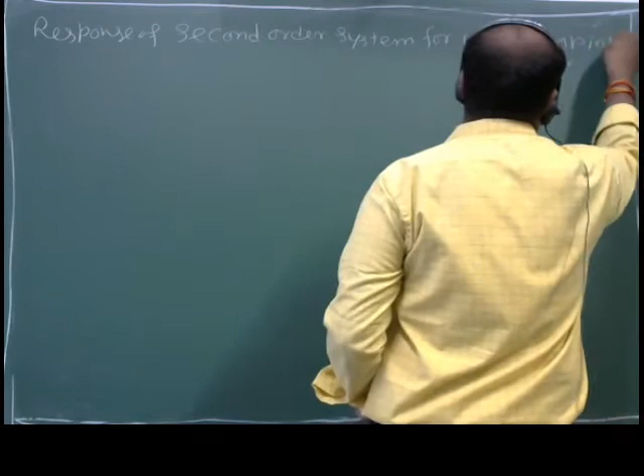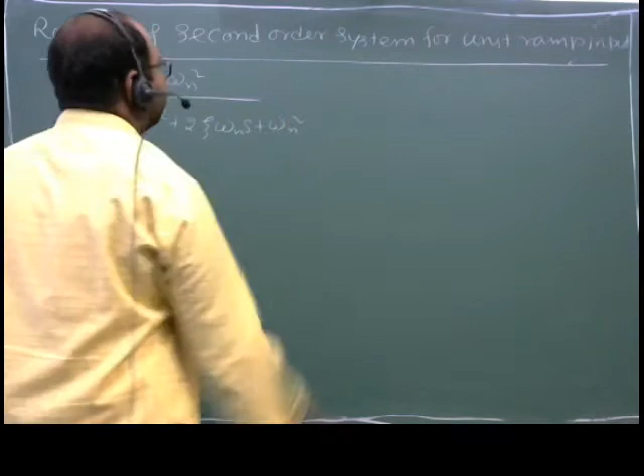So, what is the transfer function of second order system? Cs over Rs is equal to omega n square divided by s square plus 2 zeta omega n s plus omega n square. And for unit ramp input, what will be Rs? 1 over s square.

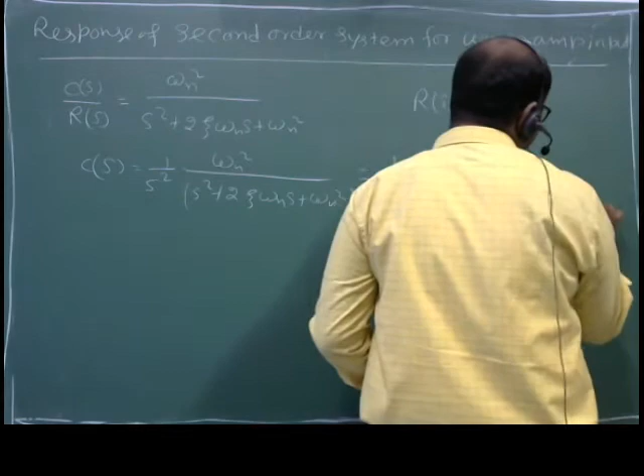So what will be the response for second order system for unit ramp input? Cs will be 1 over s square, omega n square divided by s square plus 2 zeta omega n s plus omega n square. And this can be written as 1 over s square, omega n square divided by s plus zeta omega n square plus omega n square, within bracket 1 minus zeta square.

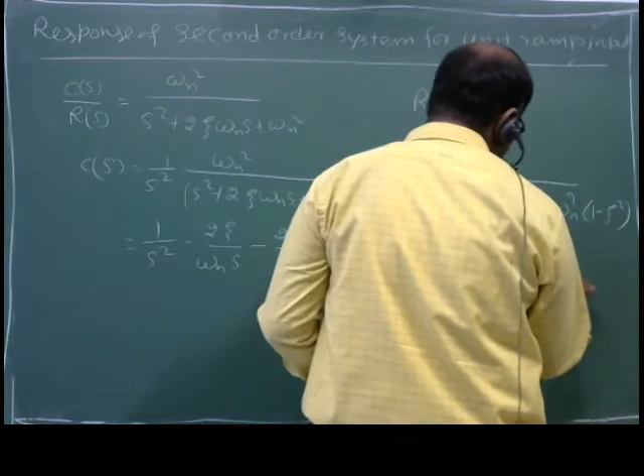And after partial fraction, 1 over s square minus 2 zeta divided by omega n s minus 2 zeta divided by omega n s plus zeta omega n divided by s plus zeta omega n square plus omega d square plus 2 zeta square minus 1 divided by s plus zeta omega n square plus omega d square, right?

And after taking inverse Laplace, our Ct becomes T minus 2 zeta by omega n plus 2 zeta by omega n e raised to minus zeta omega n t cos omega d t plus 2 zeta square minus 1 divided by omega d e raised to minus zeta omega n t sin omega d t, or

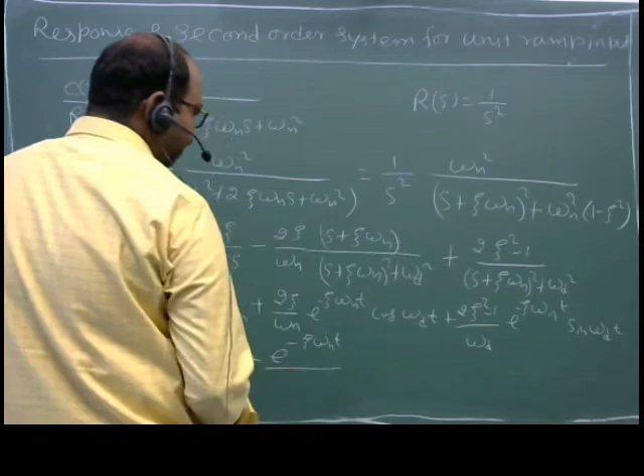t minus 2 zeta by omega n plus e raised to minus zeta omega n t divided by omega n under root 1 minus zeta square, within bracket 2 zeta under root 1 minus zeta square cos omega d t plus 2 zeta square minus 1 sin omega d t.

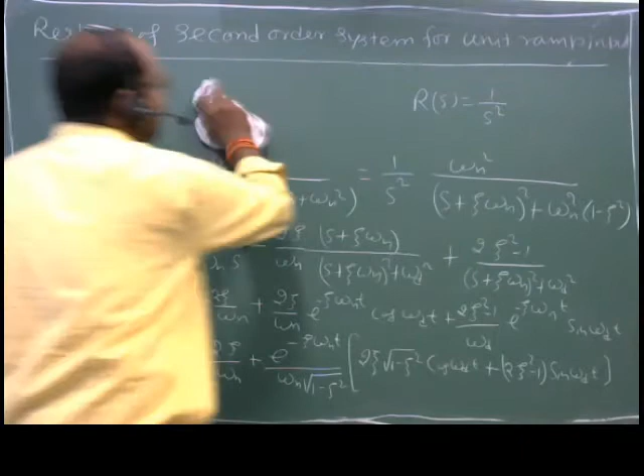And if I consider 2 zeta under root 1 minus zeta square as sin phi, then 2 zeta square minus 1 will be cos phi,

and then our Ct will become t minus 2 zeta by omega n plus e raised to minus zeta omega n t divided by under root omega n, or simply omega d, and here sin phi cos omega d t plus cos phi sin omega d t, and this becomes sin omega d t plus phi, omega d t plus phi.

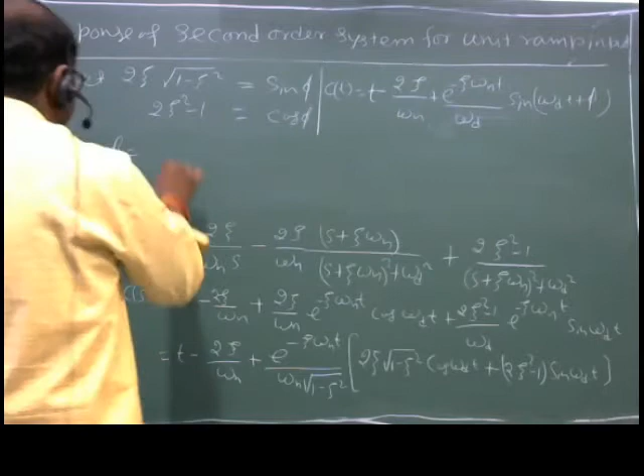Where phi can be written as tan inverse 2 zeta under root 1 minus zeta square divided by 2 zeta square minus 1. This is our phi, and from here if I calculate error,

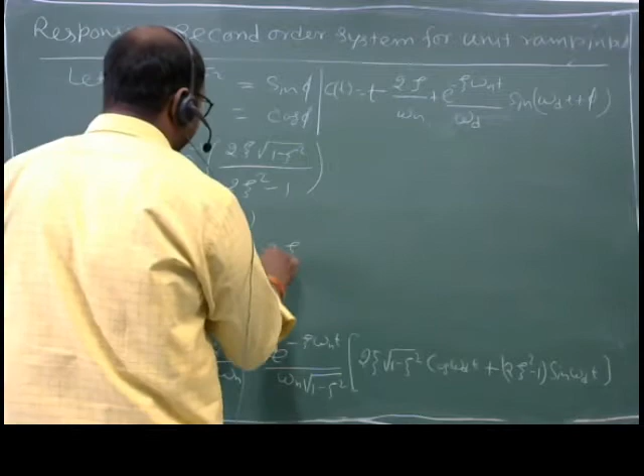then Et is equal to RT minus Ct. So RT minus Ct is error, where RT is T and Ct is T minus 2 zeta by omega n plus e raised to minus zeta omega n t divided by omega d sin omega d t plus phi.

Therefore, the error is 2 zeta by omega n minus e raised to minus zeta omega n t over omega d sin omega d t plus phi. This is our error for second order system for unit ramp response, right?

And the steady state error is nothing but limit t tends to infinity of et. This is our steady state error, and as t tends to infinity, this term goes to 0.

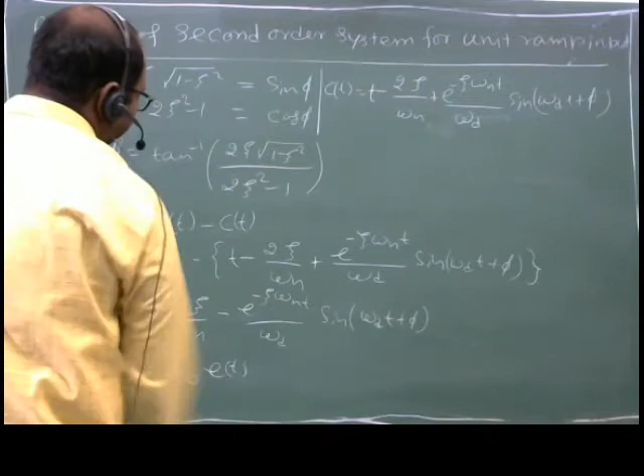Therefore, we have the value 2 zeta by omega n, and this shows that there will be a lagging of 2 zeta by omega n in output from the input, right?

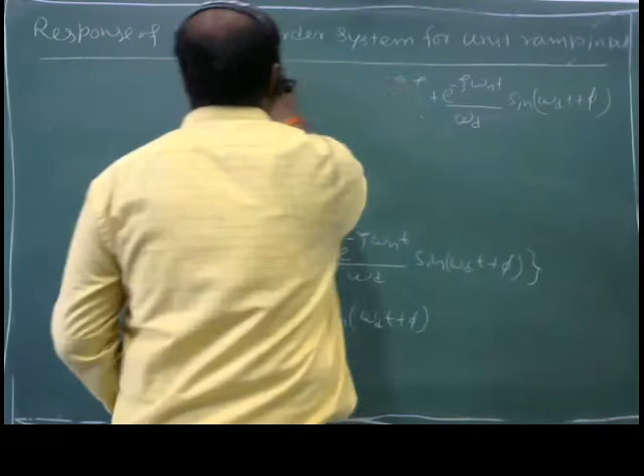Next is response of second order system for unit impulse input. For unit impulse input.

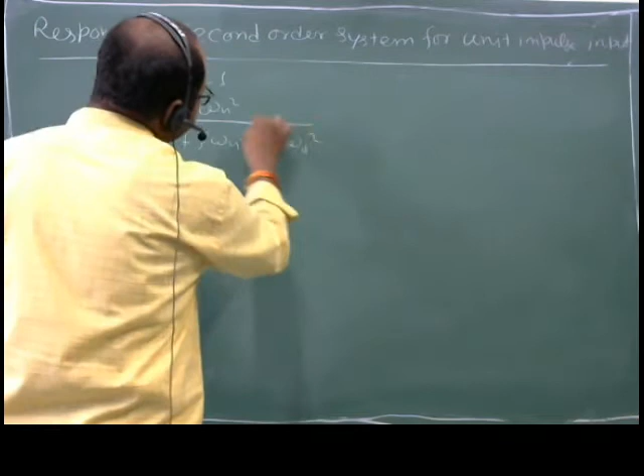Same as for the case of unit ramp and unit step input. For unit impulse input, our RS will be 1. So CS becomes omega n square divided by s plus zeta omega n square plus omega d square, s plus zeta omega n square plus omega d square.

And clearly our CT is omega n divided by under root 1 minus zeta square, e raised to minus zeta omega n t sin omega d t. This will be our response of second order system for unit impulse input.

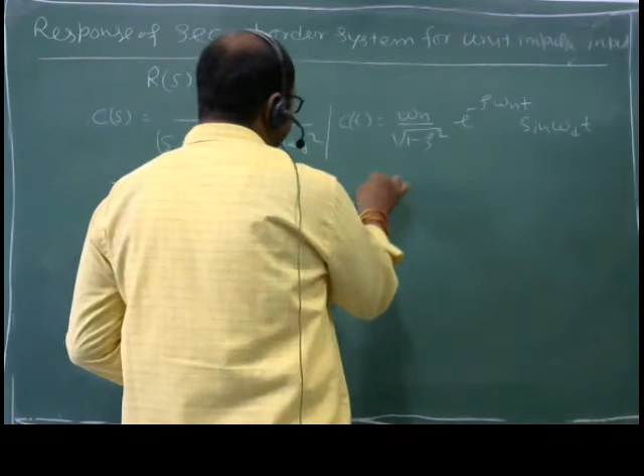Now, as zeta is less than 1, the response will be CT is equal to omega n divided by under root 1 minus zeta square, e raised to minus zeta omega n t, sin omega n under root 1 minus zeta square t. And there will be no change in the response when zeta is less than 1, and clearly it is underdamped response.

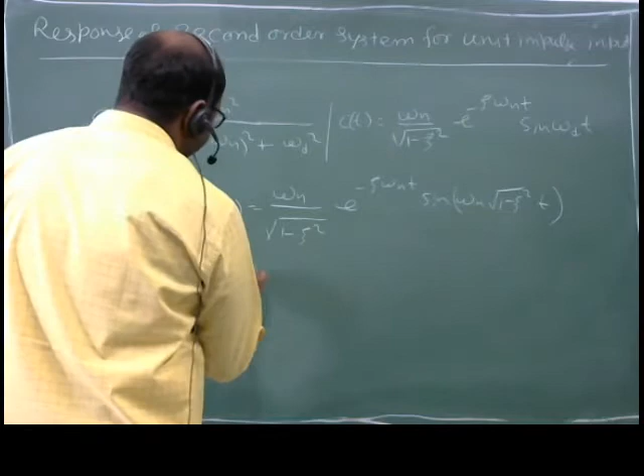Critically damped response for zeta equal to 1. As zeta is equal to 1, this term CT will be omega n e raised to minus omega n t, and in the limit as zeta tends to 1, we get sin omega n under root 1 minus zeta square t, divided by under root 1 minus zeta square. Clearly this is a 0 by 0 term, not defined. So I will have to multiply omega n t in the denominator, giving omega n square t e raised to minus omega n t as zeta tends to 1.

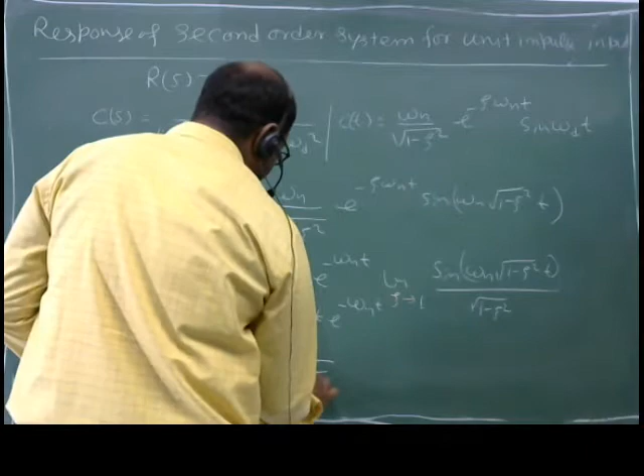Third case, when zeta is greater than 1, our CT will be omega n divided by j under root zeta square minus 1, e raised to minus zeta omega n t, sin j omega d t.

So this is the response of a second order system for unit impulse input.

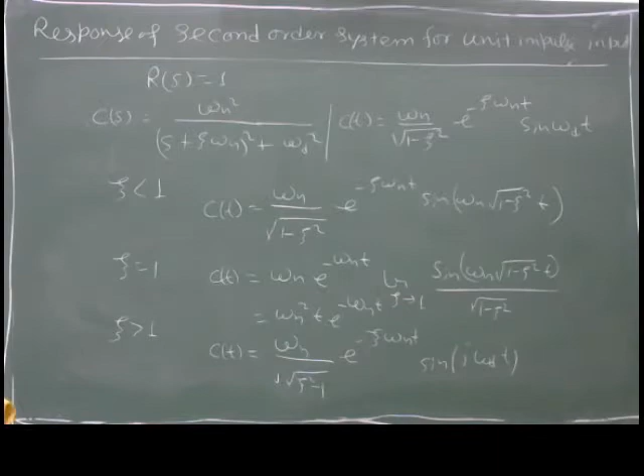Next is error analysis, steady state error. So steady state error is error as t tends to infinity. Error in the system as t tends to infinity is known as steady state error.

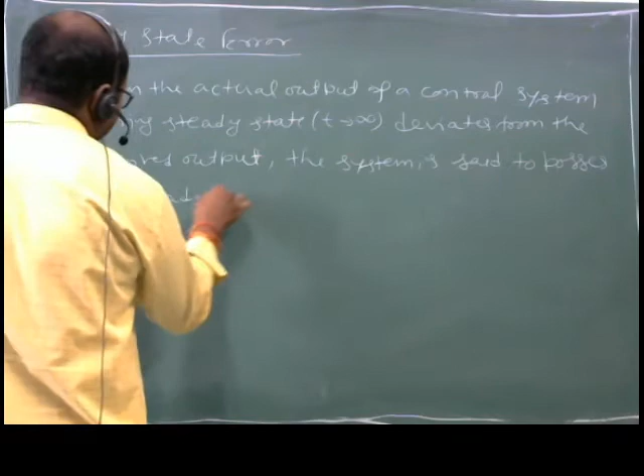When the actual output of a control system during steady state, meaning as t tends to infinity, deviates from the desired output, the system is said to possess a steady state error. So when actual output deviates from the desired output as t tends to infinity, the system has steady state error.

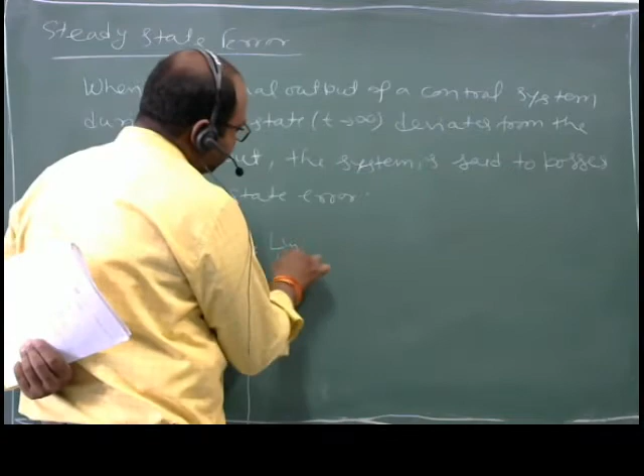For calculation of steady state error, ESS, I can calculate limit t tends to infinity of ET. But limit t tends to infinity ET is a very complex calculation. So another formula for ESS is limit s tends to 0 of S into ES.

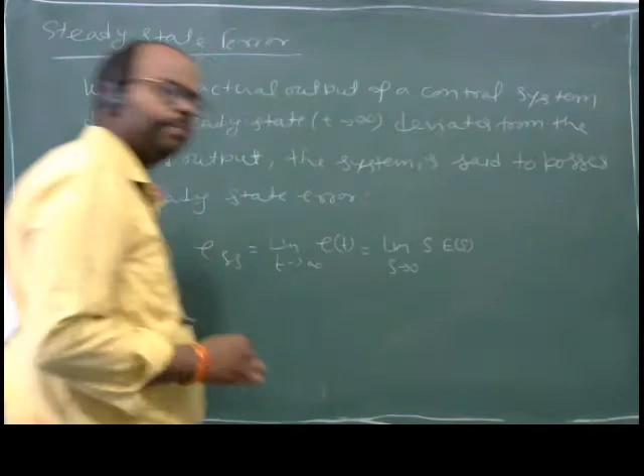And what is ES for this type of system? ES is RS divided by 1 plus GS HS.

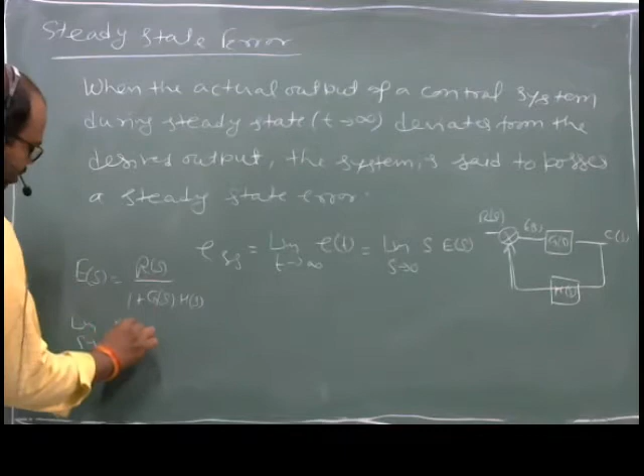And as S tends to 0, ES is limit S tends to 0 of RS divided by 1 plus limit S tends to 0 of GS HS. From this formula, if I calculate limit S tends to 0 of S ES, this will be limit S tends to 0 of S RS.

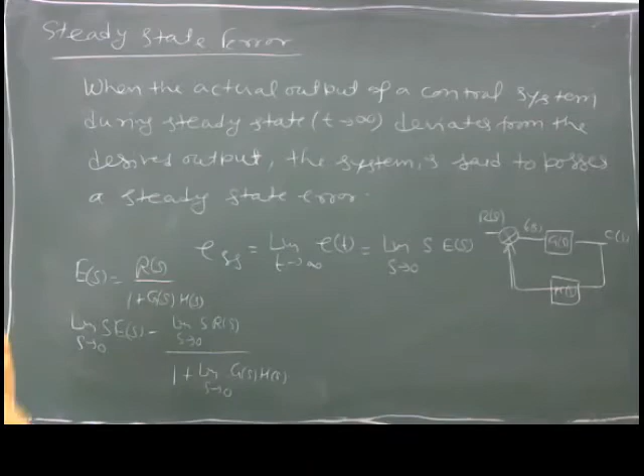For unit step input, RS is 1 by S. For unit ramp input, it is 1 by S square. For unit parabola input, it is 1 over S cube, like 2 over S cube, but keeping the 2 aside, I am taking it as 1 over S cube.

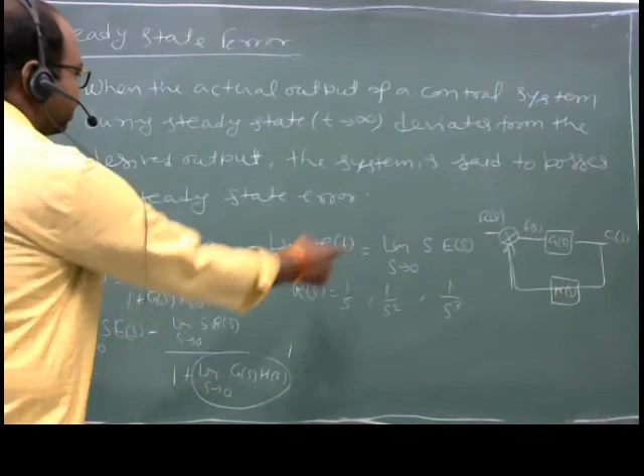This can be calculated as, if I put RS is equal to 1 over S, then S and S cancel out, and the main feature is this part. For 1 over S square, one S cancels out, and this can be written as 1 over S plus S GS HS. As S tends to 0, this term goes to 0, so now limit S tends to 0 of S GS HS is the main part of steady state error.

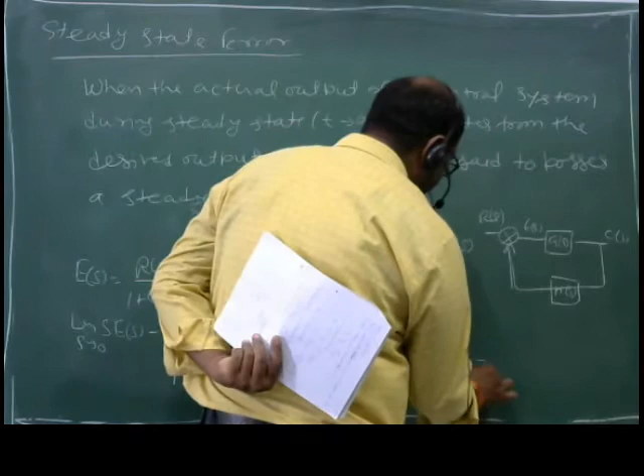And third one, if the input is 1 over S cube, then this becomes 1 over limit S tends to 0 of S square GS HS. So finally, for calculation of ESS, the main role is this term GS HS, which is present everywhere.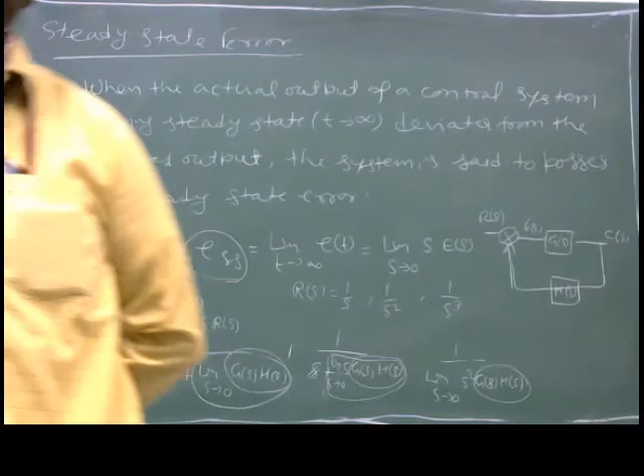GS HS is present everywhere, so we should know about this GS HS. What is this GS HS? For any system, what is the closed loop transfer function? CLTF is GS over 1 plus GS HS.

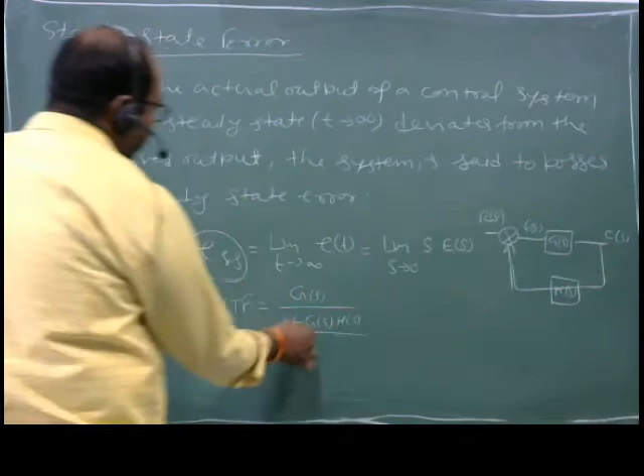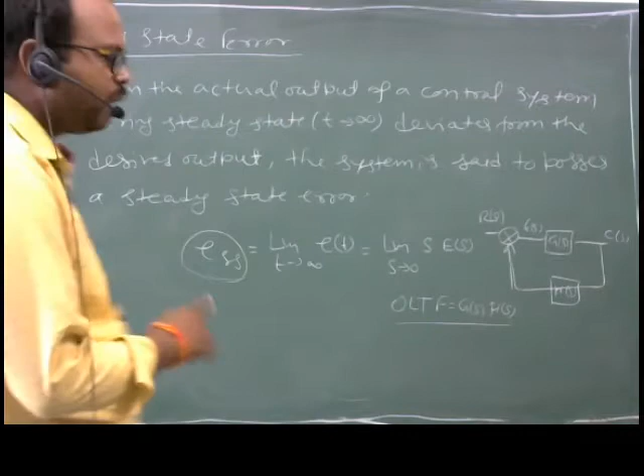Here this GS HS is termed as the open loop transfer function, meaning the product of forward path gain and feedback path gain is called the open loop transfer function.

And the type of GS HS we can calculate from the number of poles of GS HS at the origin, and this shows the type of the system.

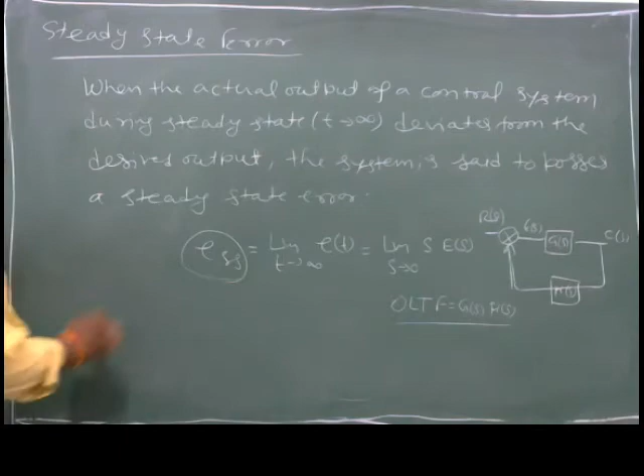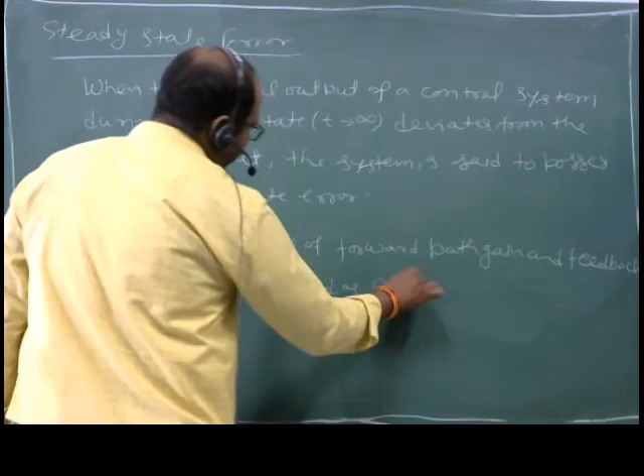So the definition of open loop transfer function: the product of forward path gain and feedback path gain is termed as open loop transfer function.

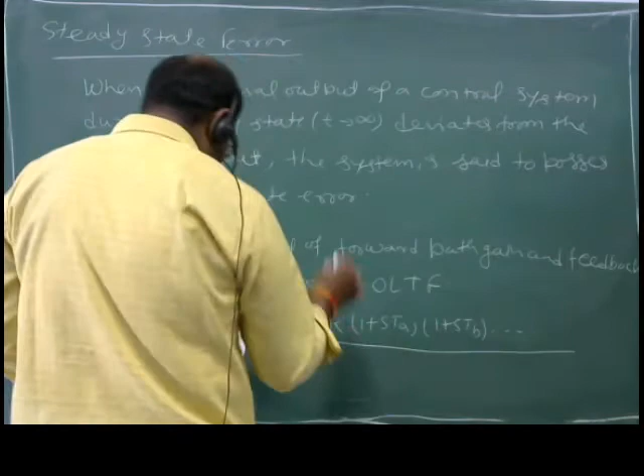This open loop transfer function in general terms can be given as K, a constant or DC gain, times 1 plus STA, 1 plus STB, and so on, divided by S power n, 1 plus ST1, 1 plus ST2, and so on. This is the general form of open loop transfer function, GS HS.

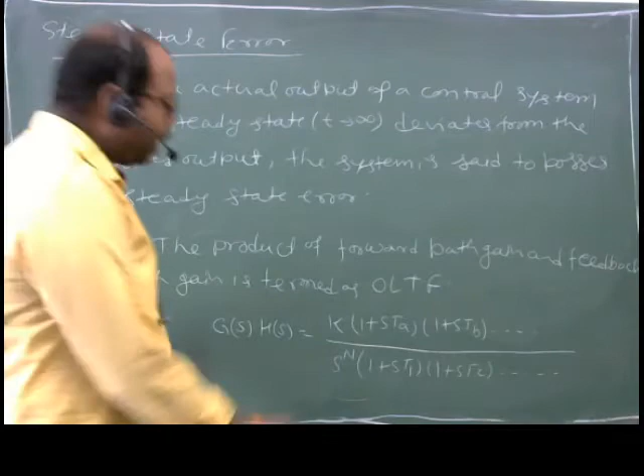In this GS HS, K is the DC gain of the system. How can I calculate this DC gain? If all the S's are set to 0, then GS HS will be equal to K.

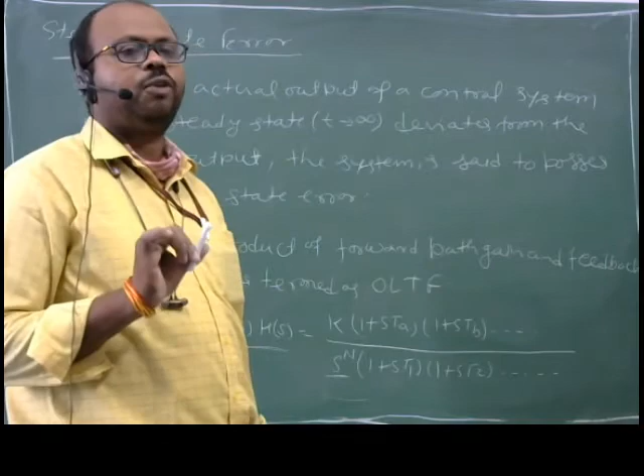So this definition that as S tends to 0, GS HS will have the value of DC gain, is wrong, as far as this S power n is present. So first of all, define the type of the system.

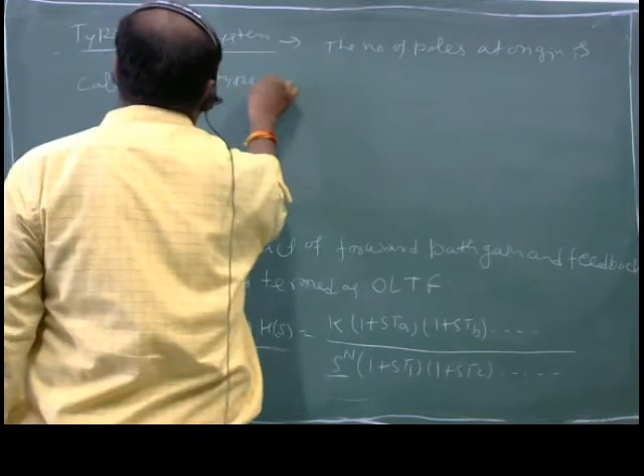What is the type of the system? The type of the system is the number of poles at origin. That is called the type of the system. So number of poles at origin, let's call this n.

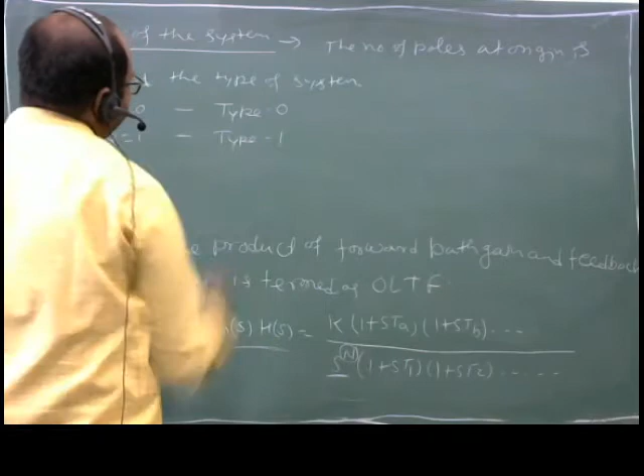If n is equal to 0, then there is no pole at origin, so the type is 0. If n is equal to 1, there is one pole at origin, so it is a type 1 system. If n is equal to 2, it is a type 2 system, and so on. For n is equal to n, it is a type n system.

So for type 0 system, is this definition correct, that as s is equal to 0, this GSHS has only the DC gain, right?

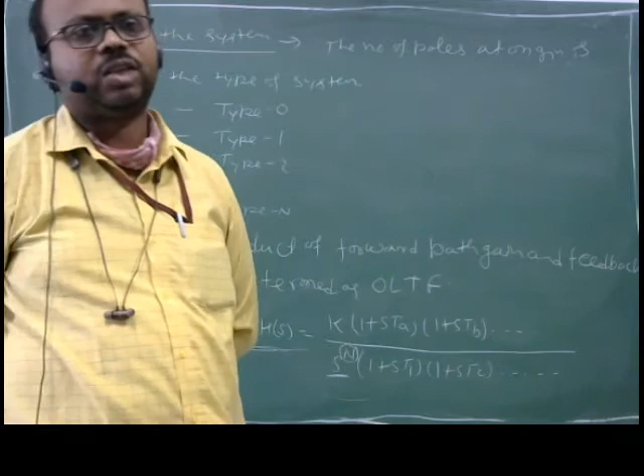GSHS by s when s is equal to 0. Is that clear? Now, not division, I have to multiply s, so s times GSHS here, and then I will find the value of k when s is equal to 0, right?

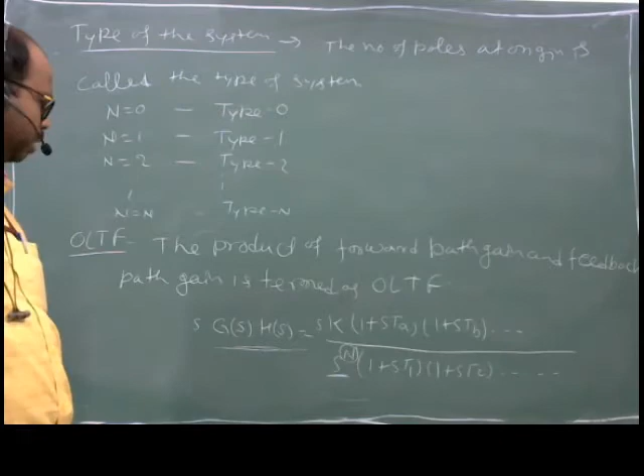So this is the type of the system.

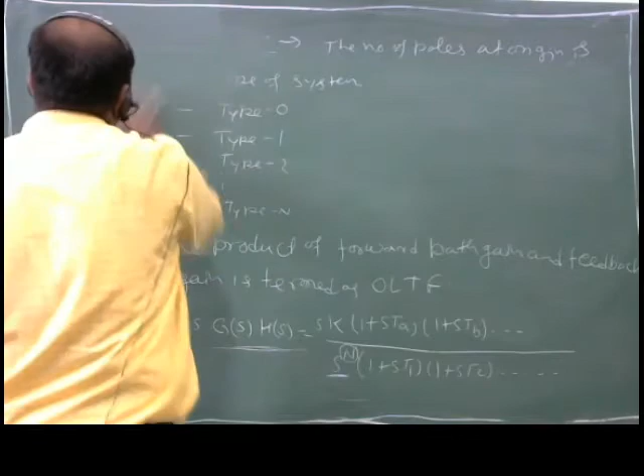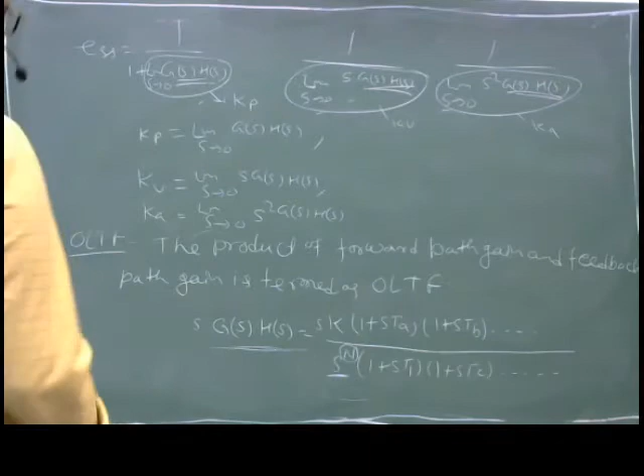अगर F S, FT का लाप्लास है, तो S F S क्या होगा? किसका लाप्लास होगा? दिस विल बी द लाप्लास ऑफ F डैश T, मीन्स फर्स्ट डेरिवेटिव ऑफ F T विद रेस्पेक्ट टू T, d/dt F T। और S स्क्वायर F S क्या होगा? ये किसका लाप्लास होगा? F डबल डैश T, और d2 ओवर dt2 F T।

तो अगर हम इसको डिस्प्लेसमेंट माने, तो डिस्प्लेसमेंट और पोजीशन, तो अगर ये पोजीशन है और डिस्प्लेसमेंट है, तो फर्स्ट डेरिवेटिव विद रिस्पेक्ट टू टाइम, ये क्या बनेगा? वेलोसिटी। एंड सेकेंड डेरिवेटिव ऑफ डिस्प्लेसमेंट और फर्स्ट डेरिवेटिव ऑफ वेलोसिटी, ये क्या बनेगा? एक्सेलरेशन।

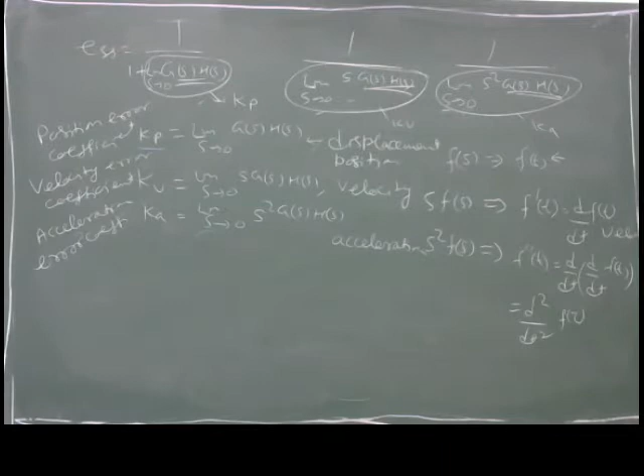So next is static error coefficients.

Static error कोइफिशिएंट्स। तो यही जो Kp, Kv और Ka हैं, इनको क्या नाम दिया गया? स्टैटिक एरर कोइफिशिएंट्स। So during steady state period, the error is also called static error, and therefore first is position error coefficient, which is Kp.

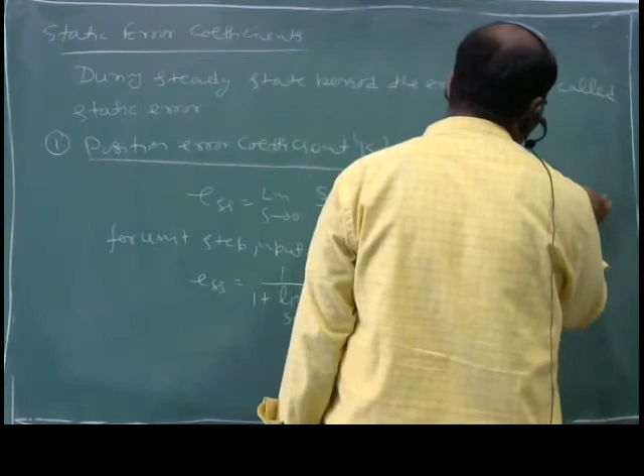So ESS is limit s tends to 0, s Rs divided by 1 plus Gs Hs, for unit step input. Rs is equal to 1 by s. So ESS is equal to 1 over 1 plus limit s tends to 0 Gs Hs, and Kp is limit s tends to 0 Gs Hs, and therefore ESS is equal to 1 over 1 plus Kp.

तो Kp कब कैलकुलेट होगा? When step input is there. Kp कब कैलकुलेट होगा? When step input is there, right? Next is, this one is static position error coefficient. Next is static velocity error coefficient.

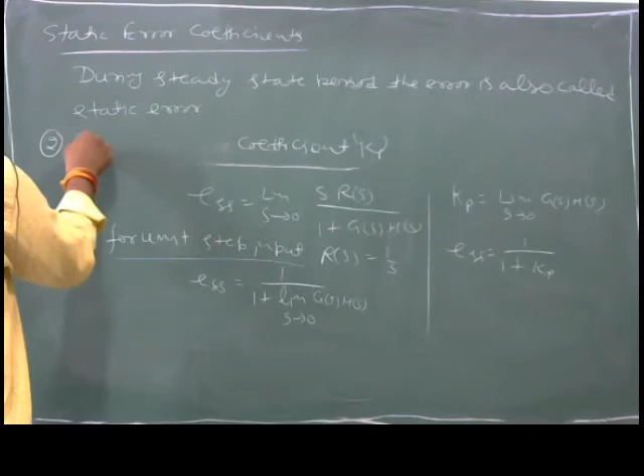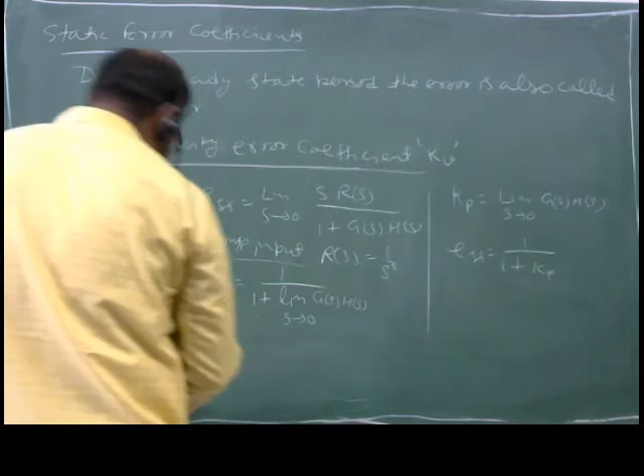Static velocity error coefficient, and it is notified as Kv. Again, ESS is equal to limit s tends to 0, s Rs over 1 plus Gs Hs, and for unit ramp input, Rs is equal to 1 over s square, and in that case this becomes limit s tends to 0 of s plus s Gs Hs, and as s tends to 0, this value goes to 0, and ESS becomes 1 over limit s tends to 0 s Gs Hs, and Kv is limit s tends to 0 s Gs Hs, and steady state error is nothing but 1 over Kv.

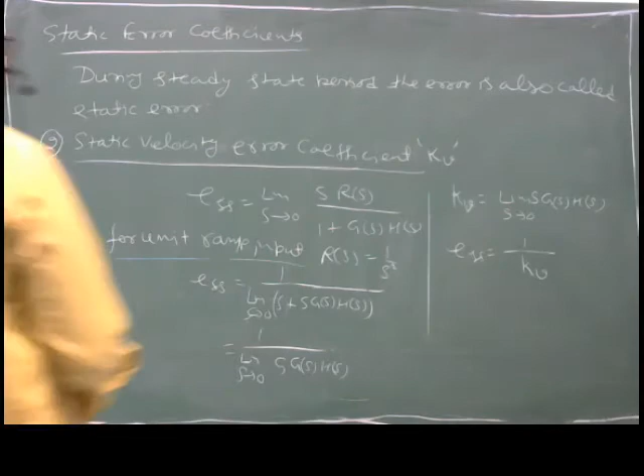Steady state error is nothing but 1 over Kv. Third one is static acceleration error coefficient. Acceleration error coefficient.

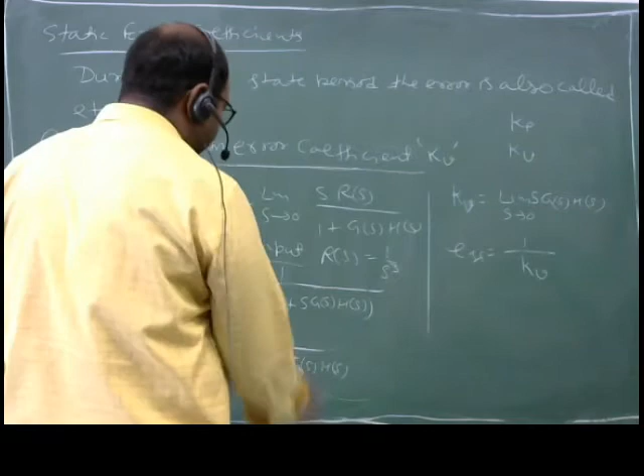So first, for unit step input, I will calculate only Kp. For unit ramp input, I will calculate only Kv, and for unit parabola input, Rs becomes 1 over s cube, and then this value becomes like this, 1 over limit s tends to 0, s square Gs Hs, and here Ka is equal to limit s tends to 0, s square Gs Hs, and ESS is equal to 1 over Ka.

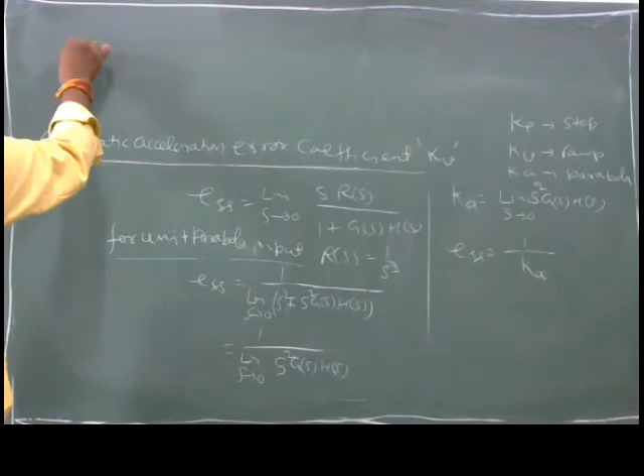ठीक है, तो अगर हम एक छोटा सा टेबल बनाना चाहें static error coefficients को लेकर, तो क्या बनाएंगे? For step input, ESS, this will be 1 over 1 plus Kp, and Kp, Kv, Ka। Kp will be limit s tends to 0, Gs Hs, right?

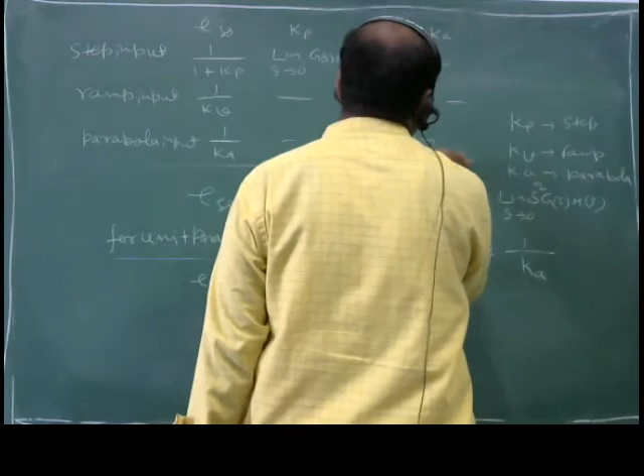For ramp input, ESS will be 1 over Kv. Kp cannot be calculated. Kv will be limit s tends to 0, s Gs Hs, and finally parabola input, ESS will be 1 over Ka, and acceleration error coefficient will be limit s tends to 0, s square Gs Hs. We can tabulate it like this.

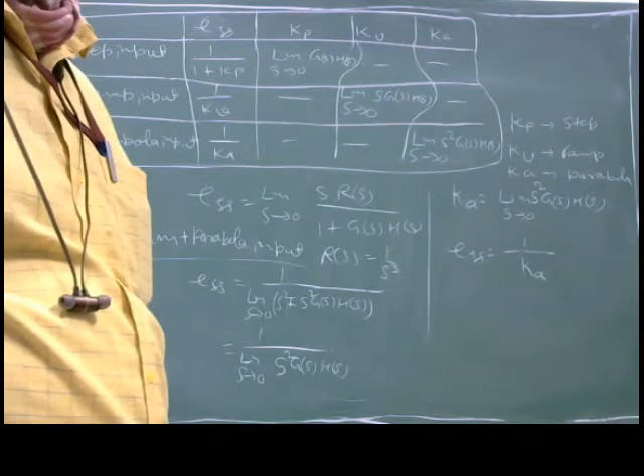Right? We can tabulate it like this. Okay. Next is steady state error for different type of systems. अभी हमने different inputs के लिए steady state error देखा, अब different types के लिए steady state error देखते हैं।

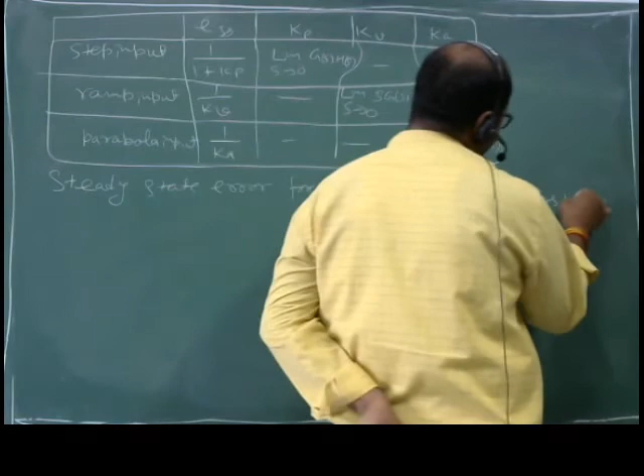First, type 0 system. Type 0 system, right? For type 0 system, Gs Hs will be like K. For type 0 system, n will be 0. So this will be like K(1 plus sTa)(1 plus sTb) and so on, divided by (1 plus sT1)(1 plus sT2) and so on. Here s की पावर 0 है because n is equal to 0, और s की पावर 0 को हम क्या बोलते हैं? 1. So what will be Kp?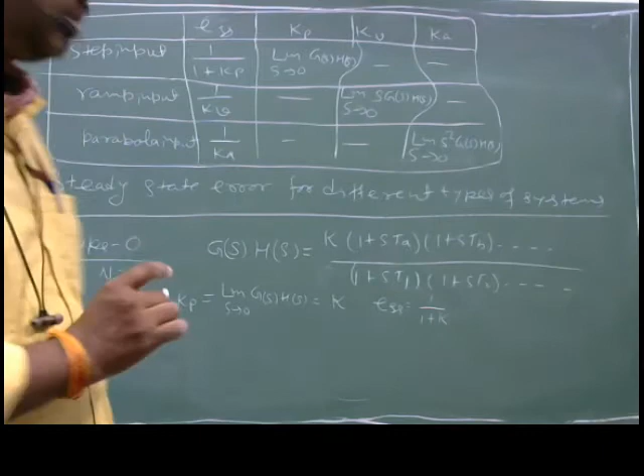For type 0 system, Kp is constant and ESS is equal to 1 over 1 plus K. Kp is limit s tends to 0 GSHS, which is equal to K, because as s tends to 0, this will be 0, this will be 0, and sir 1 is remaining. So the value of limit s tends to 0 GSHS will be equal to constant, that is K, and ESS in that case will be 1 over 1 plus K, because ESS is equal to 1 over 1 plus Kp.

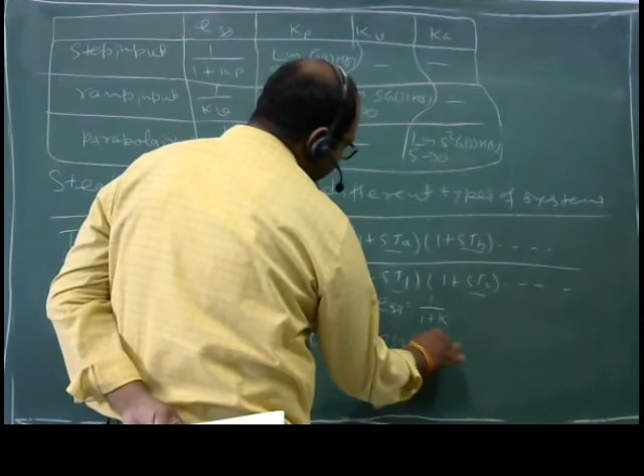Kv, limit s tends to 0, S GS HS. If I multiply s here, and then put the limit s is equal to 0, then this s makes this whole value equal to 0, and the steady state error, which is equal to 1 over Kv, this goes to infinity.

And for Ka, limit s tends to 0, s square GS HS, this will be s square, and now again this value goes to 0 and ESS becomes 1 over Ka, which is equal to infinity.

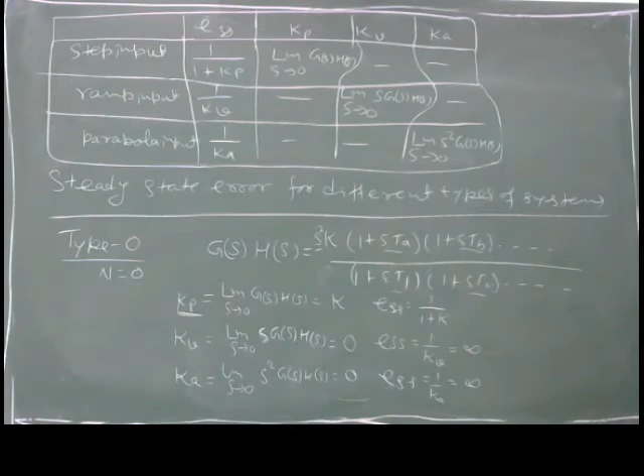So for type 0 system, I can calculate only Kp. For type 0 system, Kv and Ka will be 0. Velocity error and acceleration error coefficients will be equal to 0, but the position error, static position error coefficient will be constant, and therefore the steady state error will be finite. Acceleration and static velocity error coefficients become 0 for type 0 system. Therefore, the steady state error becomes infinity.

Next type is type 1 system. For type 1 system, n is equal to 1. In that case, GS HS is equal to K(1+sTa)(1+sTb) and so on, divided by S power 1, (1+sT1)(1+sT2) and so on. In this case, when I calculate Kp, limit S tends to 0, GS HS.

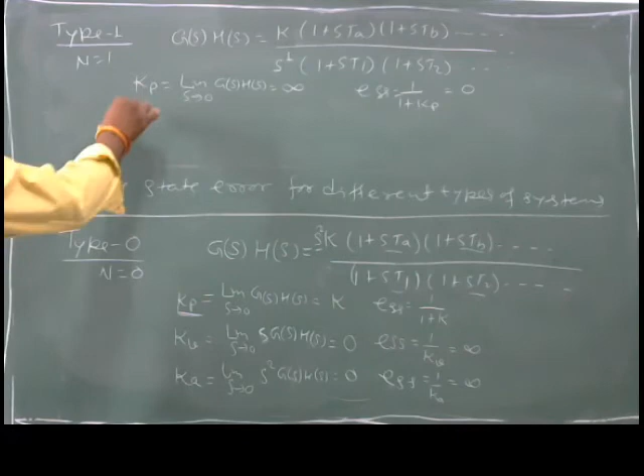Second, Kv, limit S tends to 0, S GS HS. So as S tends to, SGSHS, here I am having one S, so this has cancelled out, and as S tends to 0, this becomes a constant K, and therefore steady state error is equal to 1 over Kv, or 1 over K.

And for the last value Ka, limit S tends to 0, S square GS HS is equal to, as it becomes S square, one S is cancelled out from this S, and now as S goes to 0, this value also goes to 0, and ESS becomes 1 over Ka, which is equal to infinity.

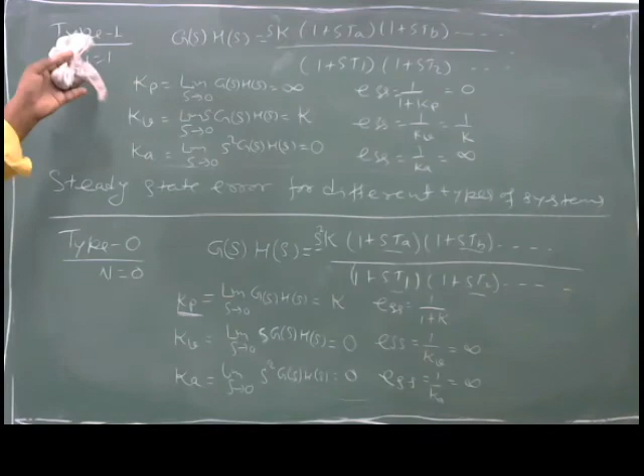So look, as the type of the system increases, the static error coefficients are changing from position error coefficient to velocity error coefficient.

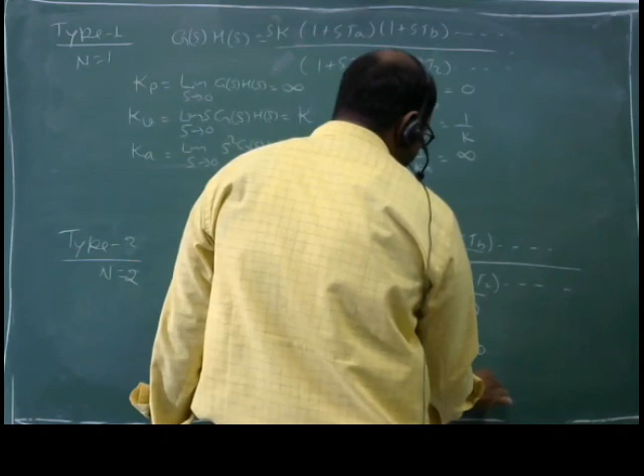So, type 2 system. Type 2 system, n is equal to 2, and for type 2 I am having here s power 2. In this case, Kp, s tends to 0, GSHS is infinity. Kv, s tends to 0, s GSHS - one s cancels out, and this is still infinity. Ka, s square GSHS - as soon as we put s square, this cancels out and here we get K. And ESS, its value will be 0, this value will be 0, and this value will be 1 over K.